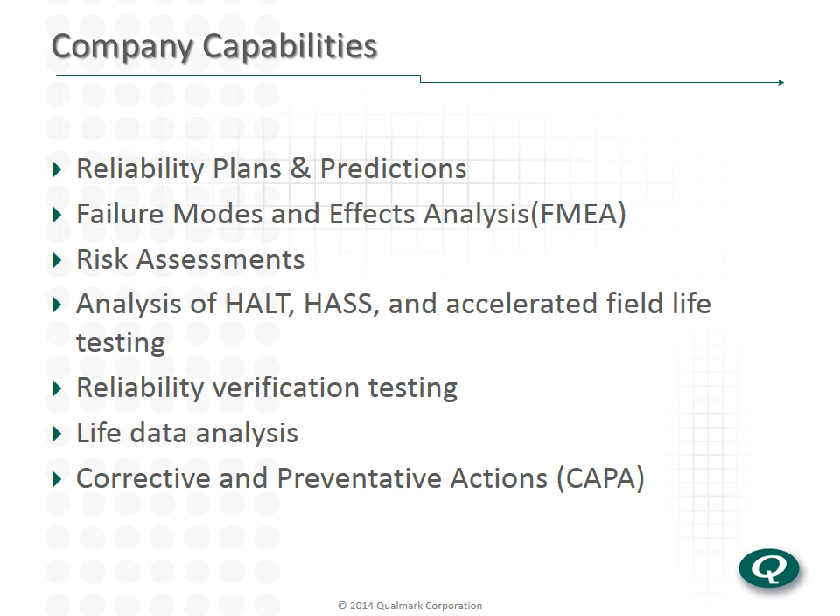Today we're going to talk about several things that are related to both risk management and reliability engineering. Over the years, as I have worked in various industries and worked specifically in the medical device industry, it's become very obvious that there are many, many similarities between risk management and reliability engineering. In fact, many companies combine those two disciplines.

We'll talk today about some of the reasons for that similarity between those two things and how we can use that to our advantage as we meet the requirements that are imposed on us by the regulatory community. And we'll talk specifically about a couple of examples of how reliability engineering principles and tasks can help us meet our requirements, our risk management requirements.

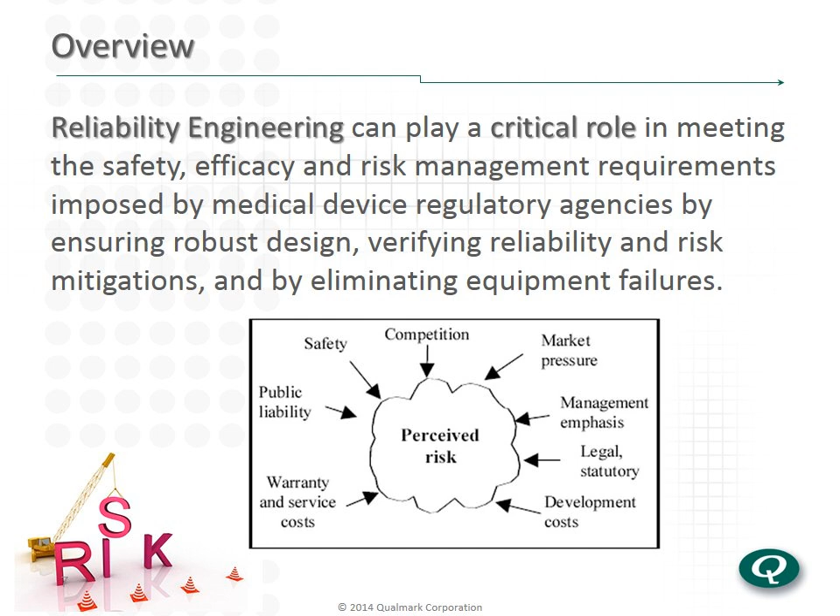So first, let's talk a little bit about reliability engineering and how it can play a role in meeting our requirements. Reliability engineering is aimed specifically at eliminating failures from our fielded products, whether they are design-related failures, whether they are failures introduced during the manufacturing process, whether they are inherent failures. We want to minimize both the failures and the impact that those failures have on our fielded product. So that's what we try to do with reliability engineering in a nutshell. I know that that is an oversimplification, but let's move on from there to talk about some definitions.

So reliability engineering is an engineering discipline, and as we talked about, its purpose is to make our products robust, to make sure that they don't fail when we don't want them to fail, when we can't have them fail. So reliability can be defined as the ability of a system to meet its required function over a stated period of time, and to meet or exceed that requirement.

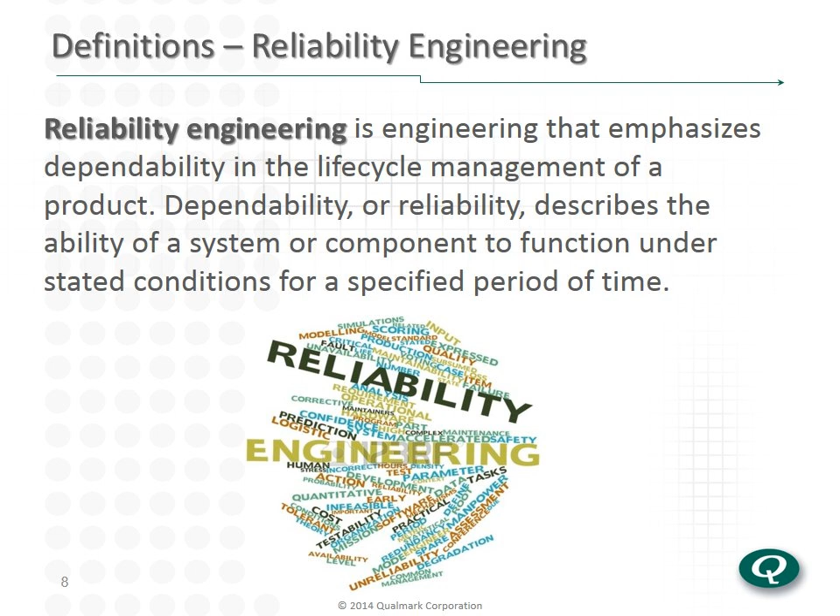Risk management is very similar, as I said. Risk management involves the identification and assessment of risks associated with the use of the equipment. Now, these risks can come from several different areas. They can come from equipment failure. They can come from human error. They can come from misuse of our product. They can come from several different areas. They can be environmental risks as well.

So, much like reliability, risk management is aimed at identifying, assessing, and taking action to eliminate risks, to eliminate the problems wherever they come from. Today, we will focus mostly on risks related to equipment failure.

As we get started, I want to talk a little bit about the 60601 3rd edition standard and what its purpose is and what it does. Basically, 60601 3rd edition combines many of the old 60601 requirements into one standard. And based on the general requirements of this standard, its requirements for basic safety and essential performance.

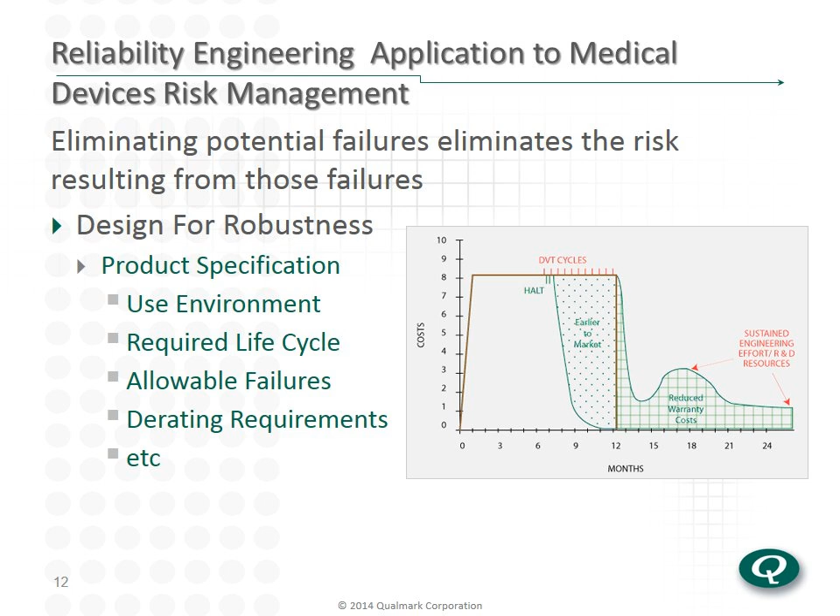And we need to make sure, I call it derating requirements, but we need to make sure, in fact, that we have adequate design margin in order to ensure that we don't put stresses on the components in our medical device that will eventually create a failure. So from a risk management standpoint and a reliability standpoint, we need to basically take the same actions in order to have a robust design.

We need to understand the potential failure modes and their effects. That allows us to prioritize the actions that we can take. We will never get to the point where we have a perfect design. We need to be able to have a logical understanding that allows us to design out those failure modes that will have an unacceptable effect on the product.

In order to do this, we need to analyze the design. We need to understand where the failure modes can occur, what happens when they do occur, and what, if anything, we can do to eliminate them. We need to understand the inherent reliability of our product. That can involve several different things.

That could involve a reliability prediction. That could involve understanding where the failures will come from. That could really understand through test, and we'll talk about this a little later, through test understanding what our design margins are and what our failures are going to be. As in any design process, we will need to make changes as we go through the process to improve our design, to improve and get to the point where we need to be.

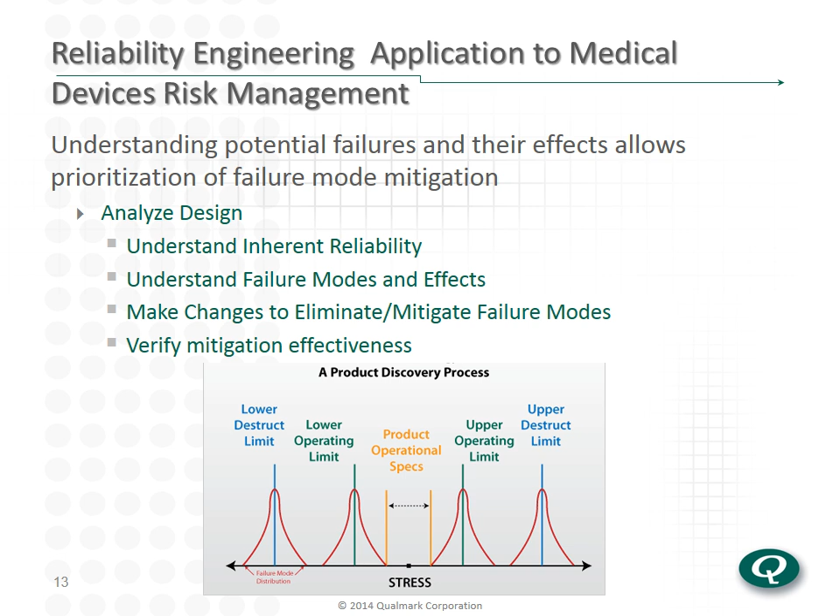HALT, which we'll talk about in much more detail as we go through this presentation, and I believe Neil will talk about that specifically, can help us understand and analyze our design strengths and our weaknesses. When we understand what our stress limits are, when we understand what our design capability is, we are in a position to make good choices regarding our design.

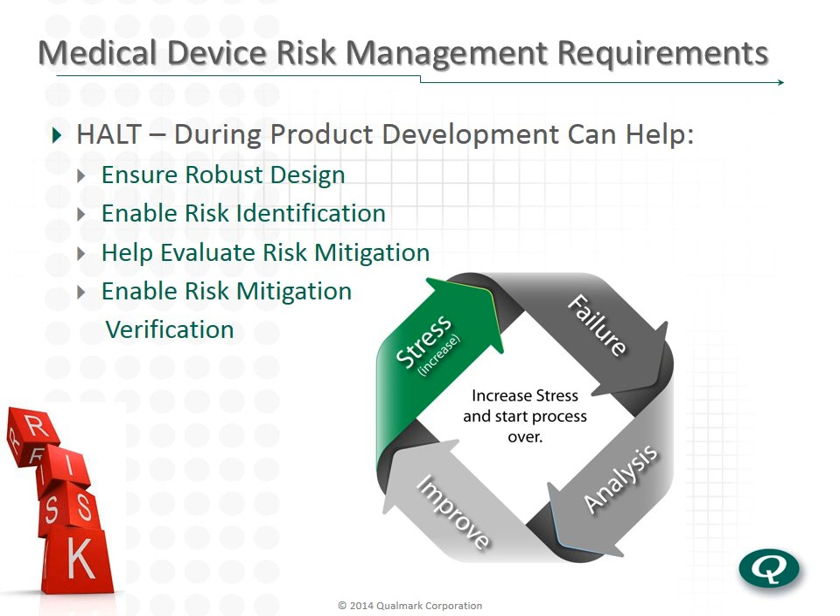We can ensure a robust design. We can ensure that we identify potential risks related to failures. We can also evaluate risk mitigation and enable risk mitigation verification. As I said, Neil will talk much more about HALT as we go along.

Reliability engineering principles can also be very critical in post-market activities. When we have adequate information about the performance of our devices once they are in the field, we are in a position that allows us to determine whether or not the device is performing as we intended. We understand what failures are occurring.

We can understand what the failure cause is, and how those failures affect patient safety. We can also understand and eliminate or mitigate further changes if we need to make them. We can make decisions regarding whether a product is experiencing unacceptable risk, whether it needs to be removed. So the point that I want to make here is that reliability and its application here is very critical in both pre-market and post-market activities of our device.

So let's talk a little bit about IEC 60601 3rd edition and some of the requirements. Now, I will say that this presentation only allows us time to talk about a few examples of reliability and how that applies to 60601. As we go through all the standard and all the clauses, we find many, many places where reliability engineering principles can be used. But let's talk about some examples.

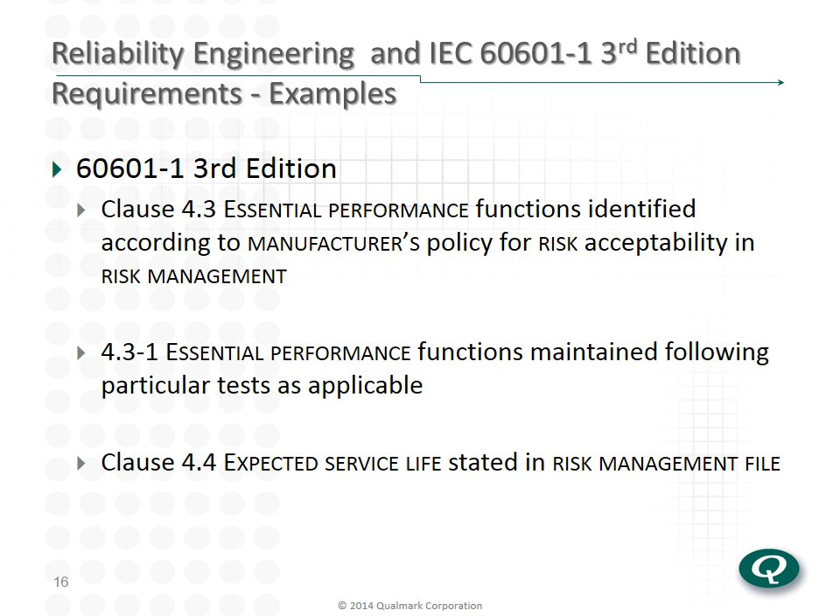So we need to consider very carefully what this device will see in its lifetime and understand how those different environments will affect the useful life of the product, will affect the failure of the product. Once again, this is something that can very well be evaluated using reliability engineering tools—the things that we've talked about, failure mode effect analysis, HALT testing, etc., all the things that we use in order to make sure our design is robust.

Other examples: Clause 4.8 talks about components and wiring, specifically looking at those components where a failure would result in a hazardous situation. This might be from exceeding their applicable ratings, or from several different areas. Specifically, that clause talks about the reliability of components used as a means of protection, and that we need to understand the reliability of those components.

Let me give you an example of what I mean. If we have a device whose safe operation depends on the function of a part or a subsystem, we are required to know the reliability of those parts. We are required to ensure that they have been tested and assessed to meet the conditions that they will be used in.

60601 specifically talks about some types of components, motors, transformers, etc., where insulation could be compromised. Those are other examples of 60601 and how it plays into the reliability engineering discipline.

Clause 4.9 talks about components with high integrity characteristics, provided because a fault in a particular component can generate an unacceptable risk. These are the types of components where a failure really can't be allowed. A failure of any of these high integrity components would result in an unacceptable risk to the patient. In other words, if it fails, somebody's going to get hurt. The standard requires us to treat these components very specially.

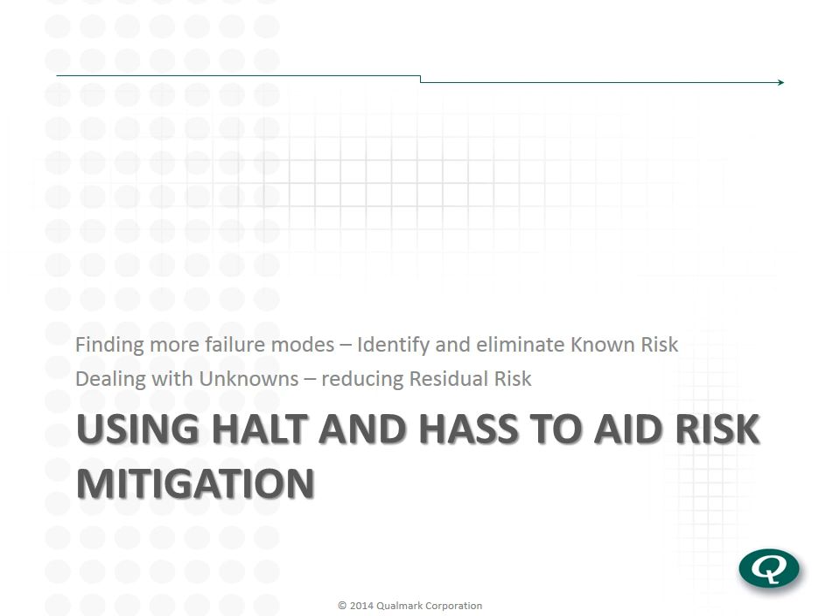Now, fortunately, we've got a fair amount of experience using HALT and HASS in the aerospace industry. And like the medical industry,

reliability is critically important in those areas. You just can't tolerate a failure in certain applications. Medical is one of them, aerospace is another.

And when failures happen in implantable devices, for example, of course, we've all heard the stories from different companies miserably going out of business from things like that.

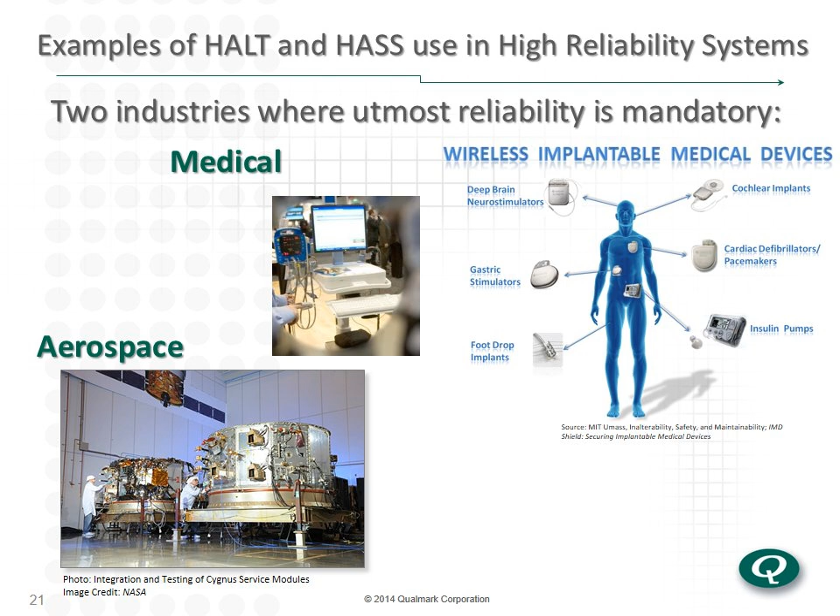HALT and HASS are used in industries like this where that high reliability is very important.

Now we are, as reliability engineers, facing challenges these days that are tougher than we ever have. We've got to keep the risk lower.

We have new requirements for understanding and reducing risk at the same time that the money side of the business is seeing price competition.

And we're having to deal with budget cuts, and we're having to deal with reduced test time, reduced resources, and time to market is being routinely reduced.

We want it fast, but we still want to be sure that there's no risk.

And there can't be a question of trade-off. We have to be sure that the risk is minimized, but we may even be dealing with technology we've never dealt with before.

So we don't completely understand how it can fail or what can go on with it. If we're not dealing with new technology, then we're not advancing as a company.

New technologies are what make us successful. But the failure characteristics of these new technologies can be poorly understood, and there's not a lot of hard historical data. So when we're faced with these challenges and the overarching umbrella of you must reduce risk,

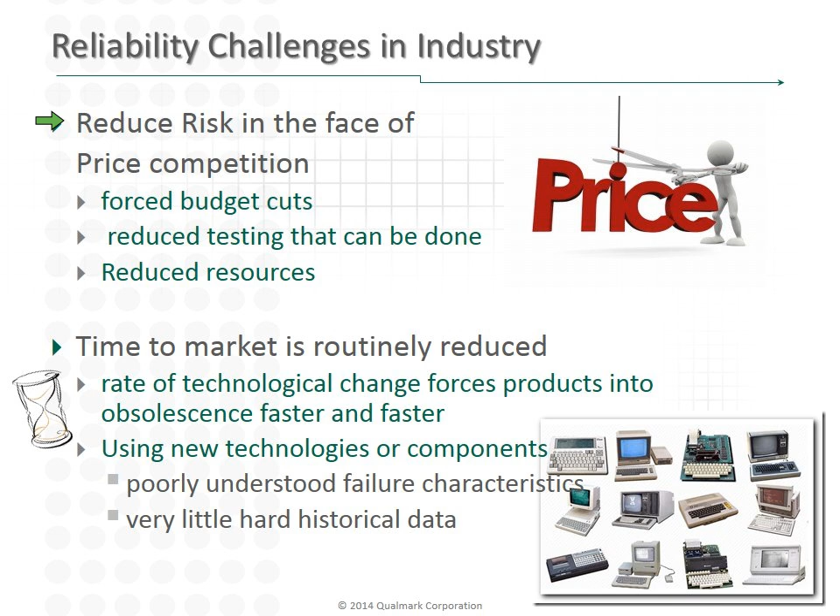we can feel like we're kind of between a rock and a hard place. But this is where HALT and HASS are very valuable for meeting these challenges.

Another challenge, of course, is that high reliability is becoming more important, and high reliability is meaning more and more.

The mean time between failure is expected to be greater now than it was 10 years ago. And when you get in a situation like that, doing standard accelerated life testing can take a long time.

And a failure found near the end of that accelerated life testing can be devastating to a timeline. I know that many companies have had significant delays to product release because near the end of accelerated life testing, they spot a design flaw. And this is not the time to find problems.

This is the time to prove you don't have any. Finding them in that process is very expensive. And you have situations where high reliability, as in medical, means either extreme cost or tragic

consequences. So you have to have that in-depth understanding of system operation and how it responds when a failure happens.

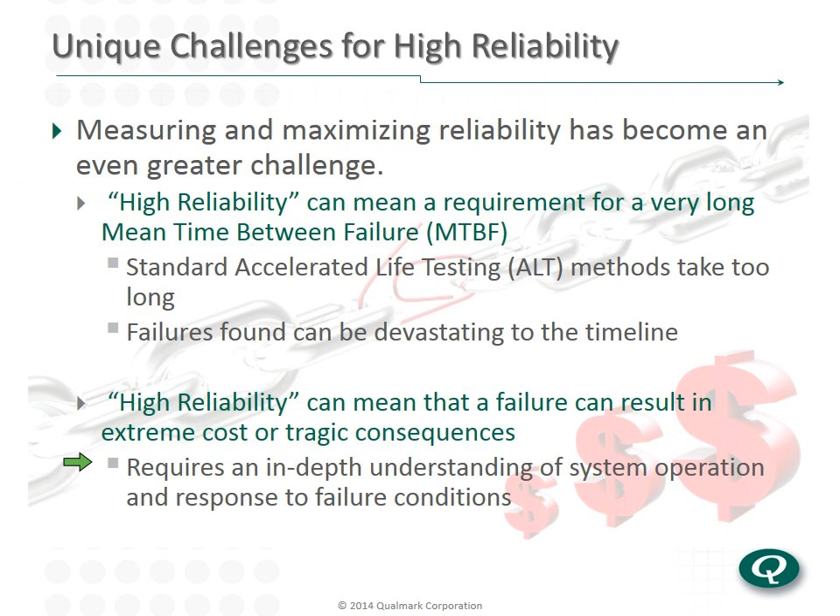A few other challenges for high reliability systems. In aerospace and in medical, we're often dealing with high dollar systems that are manufactured in relatively low volumes. And there's a package of additional challenges associated with that.

When you're running low volume, you have an inherently higher risk of variability. You're purchasing in lower quantities, so you have a risk of lot-to-lot variances that's higher than is the case in other industries.

And if you've got lower quantities, you're more likely to have hand operations. There's inherent variability in those.

So in a product where reliability is critical, you're saddled with these factors that make it more of a challenge.

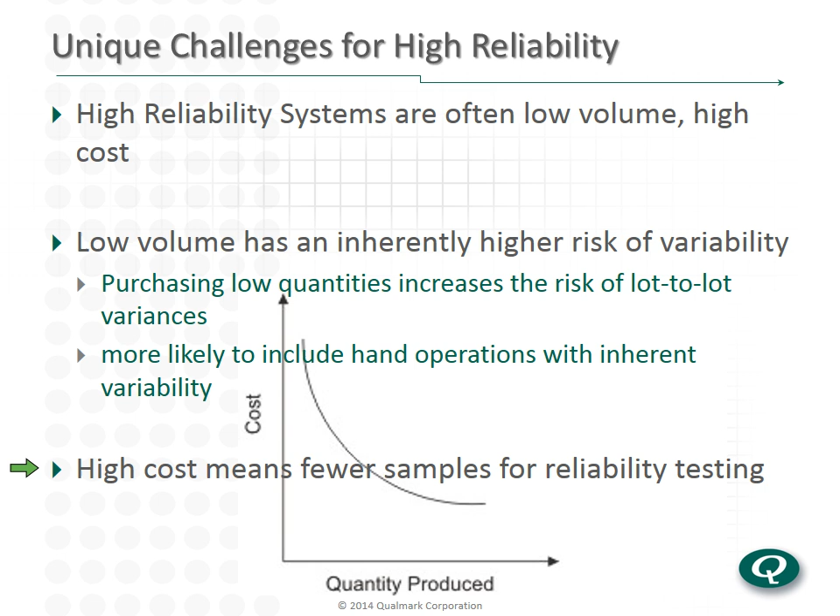And when you're doing very high dollar systems, they're very reluctant to give you 40 or 50 to do accelerated life testing on. It costs too much. So we've got fewer samples to work with and a greater challenge to meet.

As I discussed earlier, the final challenge is that a lot of times we're dealing with technology we've never dealt with before. We're continuously using higher speed devices. Every time you turn around, things are moving faster, signals are moving faster, measurements are happening faster. They're complex, interdependent subsystems, and it compounds all the difficulties.

The solution, or part of the solution, to modifying a reliability program to deal with these challenges is to shift towards more of a failure-oriented testing, a discovery process early on in the design, as soon as it is feasible, to learn as much as you can about the product, understand how it fails, with an emphasis on forcing failures and understanding how it fails. Once you get into manufacturing, you realize you have a system that is less tolerant of variability in the manufacturing process or in your component supplier, and you need methodologies for dealing with that and maintaining higher reliability in manufacturing.

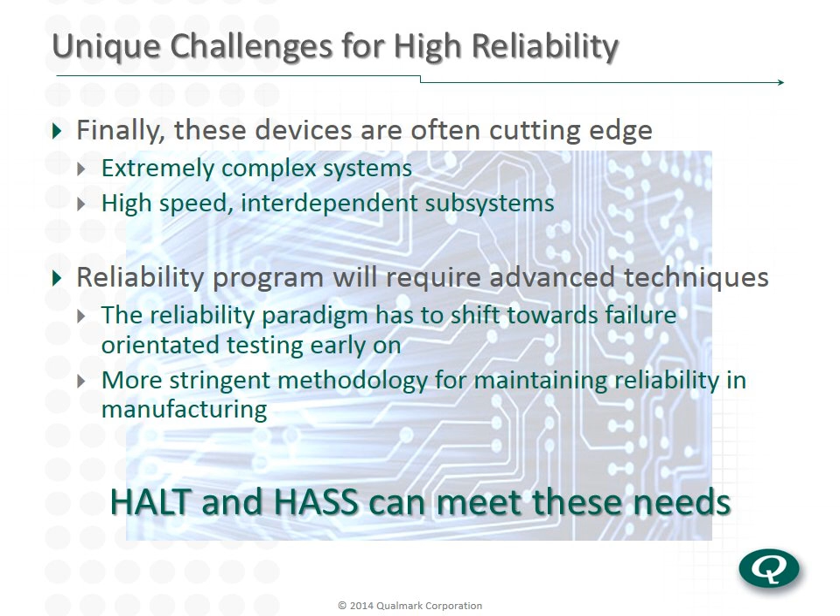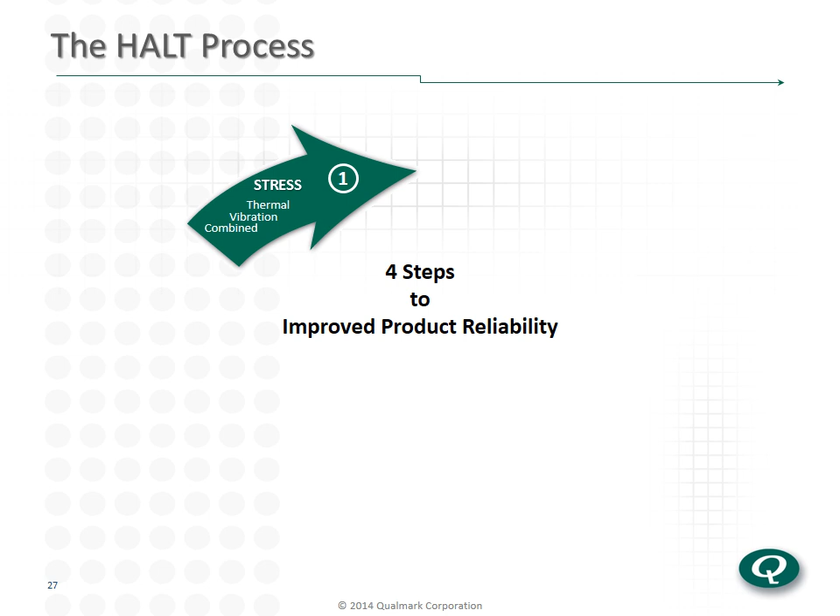We can talk about the HALT process in terms of 4 steps. First, we are stressing a product. We use thermal, vibration stresses, combined stresses, also stresses that are unique to your product. If there are other factors that can be incorporated, the more stresses you use, the more likely you are to find a fault, the more likely you are to take a risk from the unknown category and move it into the known and mitigated category.

And you increase stresses until you find failures. You determine, have I found an operating limit, a soft failure? I take the stress away, the failure mode goes away. Have I found a destruct limit, where I'm actually causing a hard failure in a product? And then...

Carefully understand - this is where the discovery process pays off. When you have a failure in your hand, you've got gold in your hands. And you need to do failure analysis in order to understand it and get down to the root cause of it and gain new levels of understanding of your product that you can't get any other way unless you force the failures to happen. See if there are improvements that can be made, corrective actions to be taken. Is this something I can fix, or is this something that is what we call a limit of the technology? We just can't do anything about it, but we understand it, we understand its effects, and we can intelligently conclude that the fault mechanism is tolerable. The key is intelligently conclude by doing failure analysis and understanding the product.

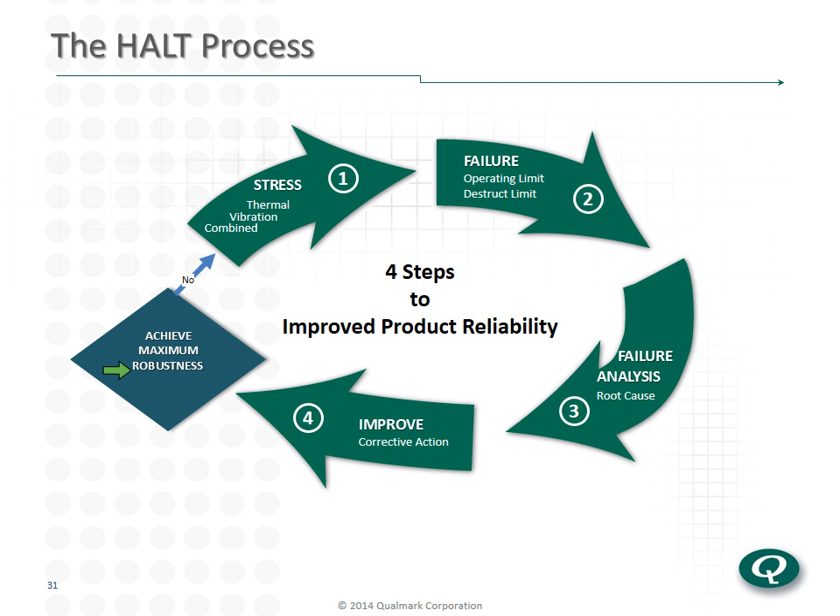If we have achieved our maximum robustness, that is, we've hit the wall for limits of the technology, made all of the improvements that we can reasonably make to eliminate risks. If we haven't done that yet, well, it's time to continue the loop and step stresses up higher, maybe switch to the next stress, continue the series until we've done everything we can to achieve this maximum robustness, which means that we have identified as many potential risks related to product failure that we can and have identified the solutions for those.

Once that is complete - and this is really the HALT process here - once that is complete, now we can take these results and use them to move into HASS, the Highly Accelerated Stress Screen. These tests use limits based on what we found here. So it's important that we go through this process before we move on here. By identifying what the product can actually tolerate and testing to those levels, rather than trying to test to levels of intended use environments, we're able to spot new risks before they turn into something that can show up in quantity in the field. We catch them at the very earliest stages and eliminate the risk before the product gets out the door.

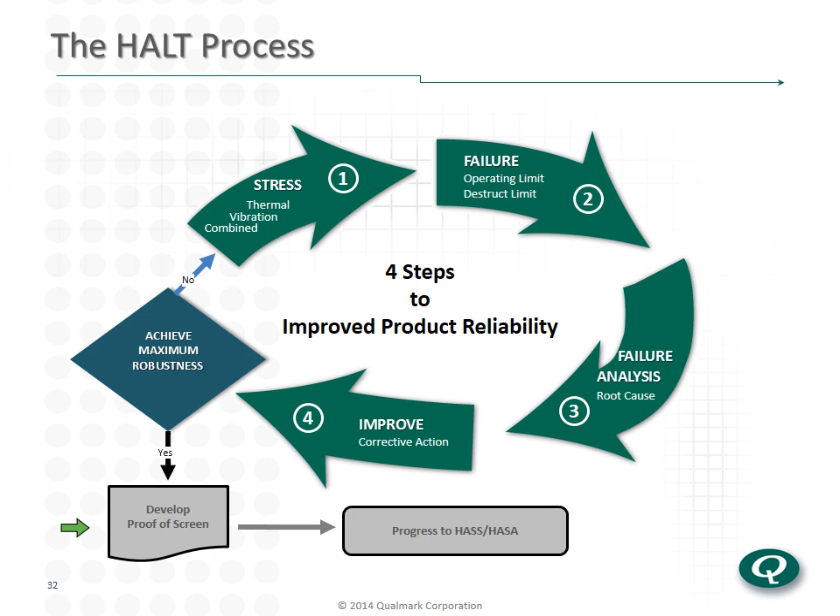Another way to understand what we're talking about in HALT and HASS is the concept of the margin improvement process. John talked about the importance of margins and the basic concept of derating to create products that are more rugged and therefore lower risk. Here you see operating limits and destruct limits that have been identified in a HALT and the actual operational specifications for a product for a particular stress. Must be the thermal because we have upper and lower limits defined.

HALT is usually done on a small sample, 4 to 6 units. So we have a few points. And if you just look at the points and say, okay, my operating limits are fairly well outside of my operating specs, what we have identified is our margins, the destruct margin and operating margin for the product on those samples.

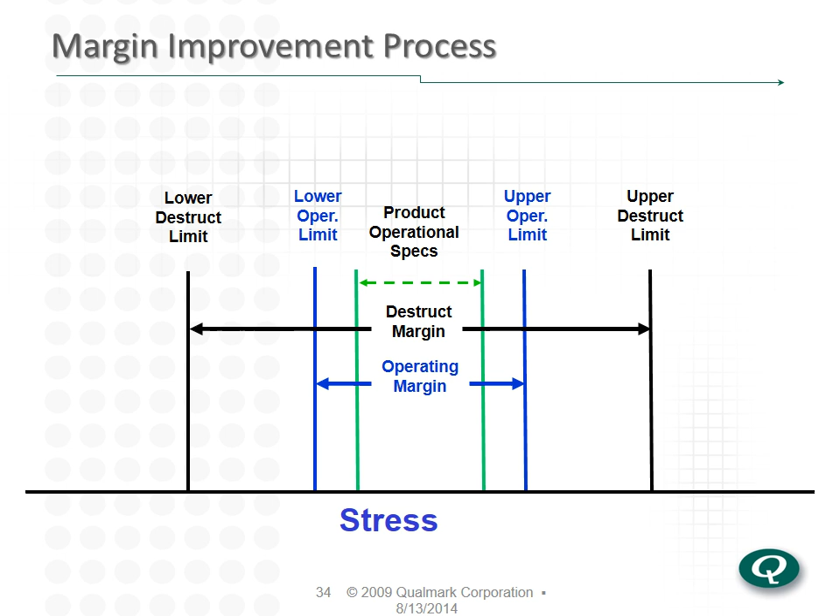The trick is that there's a distribution around those margins. We've got just a few units, and it's not just one failure mode—these distributions are really composed of many failure modes. If we eliminate a particular failure mode, that may allow us to move this operating limit out a bit and find a new failure mode. Many, many things cause this distribution to be the way it is.

But when this tail gets down into your operating specs, that means we're going to be having out-of-box failures or very early-in-life failures, even though on the few units we tested in HALT, we have operating limits that are outside of our operational specs.

By further derating the product, pushing those margins out, eliminating the failure modes we find here, what we wind up doing is getting these unknown distributions pushed out further away from our operating specs. By doing this, we make the whole system more tolerant of variances, so things don't show up as problems in the field, even when something shifts here.

As things age and fatigue in the field, we expect to see these creep in, and as components drift out of spec, we wind up with a product that has a longer life in the field before we begin to see defects in the operational range, when we've tested outside of operational specs and maximized these margins as much as makes sense.

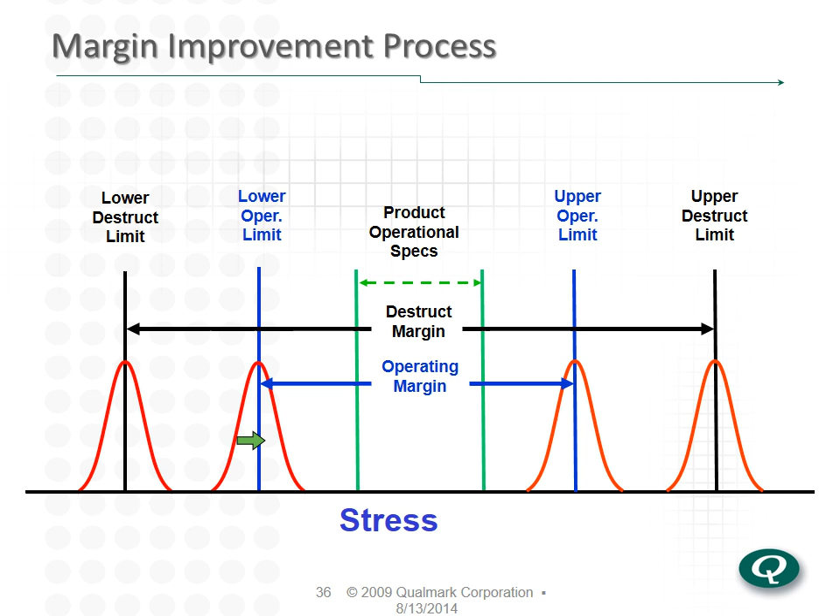The failures that you find when you're doing HALT, and you eliminate and push them out, are typically very similar to the failures you see in the first six months of a product's life in the field. We're not finding really complex things—we're finding relatively straightforward failures to fix. We're just finding them early, and that's the value.

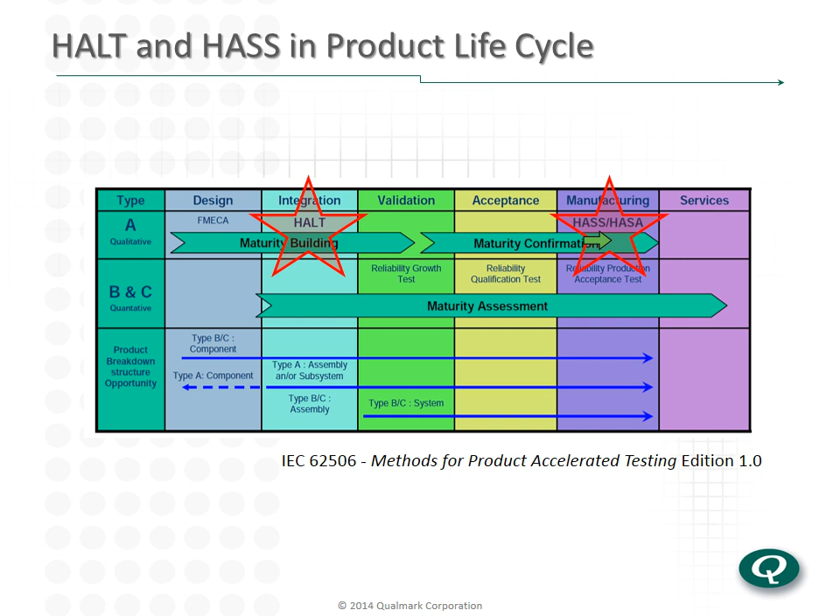If we look at IEC 62506, talking about where to use HALT and HASS in the product life cycle, it talks about HALT being a maturity building process and HASS being a maturity confirmation. The HASS production screen is really intended to give you an early warning that some new failure mode has crept in that has caused those distributions to shift.

When we develop a HASS screen, the basic idea is we understand what our operating limits are—these lines—and we develop a thermal profile that stays within the operating limits. We typically guard band that by 80%, so we don't expect to see products failing here; we expect to see them operating normally.

We also vibrate at about half the destruct limit that we identified in HALT testing. The relationship between fatigue and stress level is logarithmic, so the stress level or fatigue the product sees at this stress level is much, much lower when we go to the half limit.

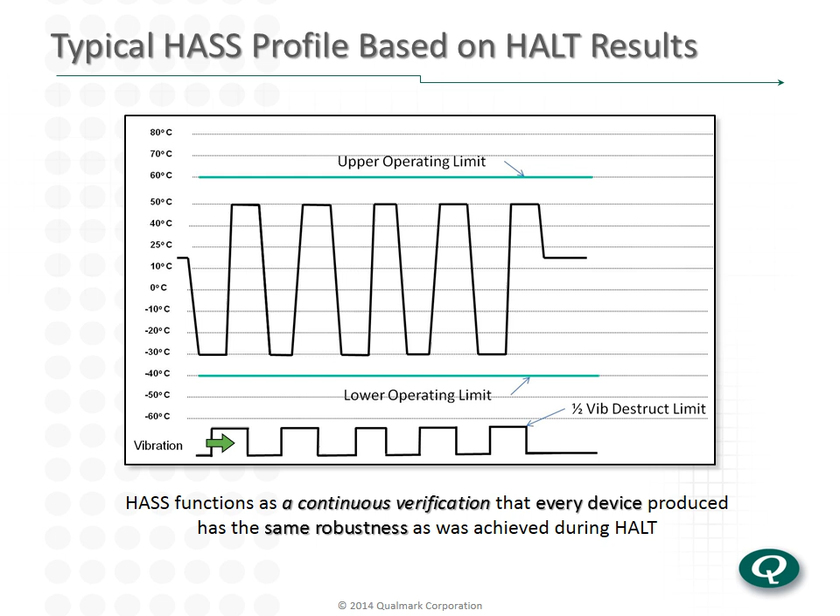Then we will do a proof of screen to demonstrate that we're not taking an unacceptable amount of life out of the product.

This whole process of using HALT and HASS to improve reliability in areas where reliability is critical is becoming much more widely adopted. Test requirements for launch, upper stage, and space vehicles—I believe HALT and HASS is being worked into those now. GM's been using them for years, Airbus, etc. We see the whole process becoming more and more adopted simply because it saves an awful lot of time and money.

Boeing used HALT and HASS in '94 on all of the key avionics components of the 777. Airbus actually published a HALT guideline saying if you want to be an Airbus vendor, HALT has to be part of your design process, and do that before your design verification. In 2011, Hamilton Sundstrand said HALT and HASS are key to meeting reliability challenges in aerospace. So you can see the value that's brought there.

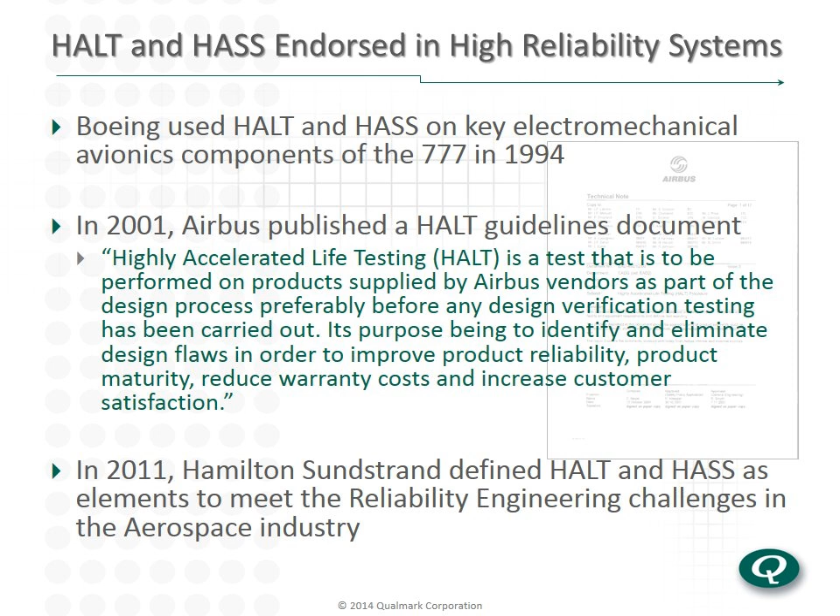So in general, we're using HALT and HASS to reduce both the known and the residual risk of failure. We talk about known or identified risks—the ones due to failure modes we have predicted or found in testing. But then we have the residual risk, the ongoing risk of things we don't know or variables we can't control.

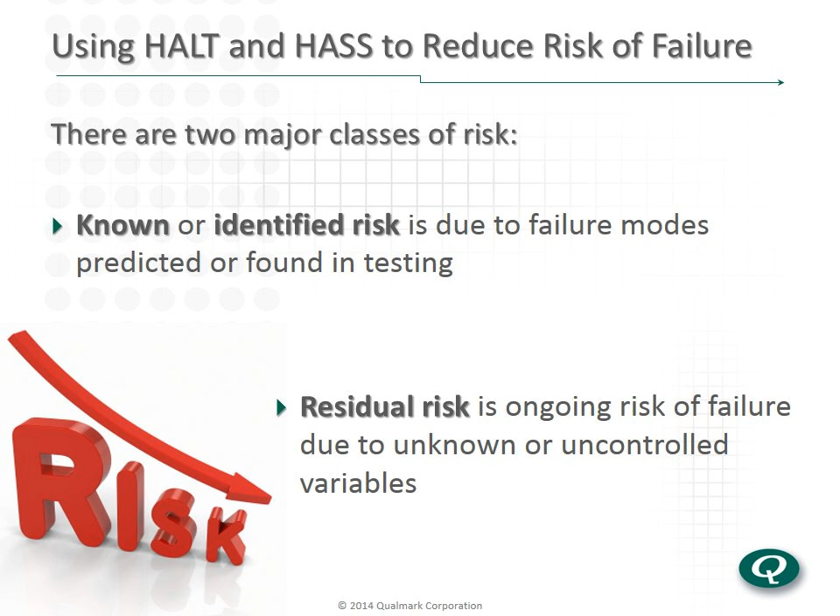To get rid of known risk, these are the things John talked about: let's do failure mode analysis, accelerated life testing, reliability growth testing. We can use HALT here to identify more failure modes, pull them into the known category, eliminate them, and then with those extreme stresses, demonstrate that those risks have been eliminated.

In satellites, they've found HALT to be extremely valuable. We had a nice paper published on using HALT at Space Systems Loral, basically saying we're convinced that HALT was instrumental in the successful qualification program and smooth transition into production. Again, indicating HALT is done before you go into your qual. It's not something you do at the end. You want to do this early and often and then move into your final qual with confidence.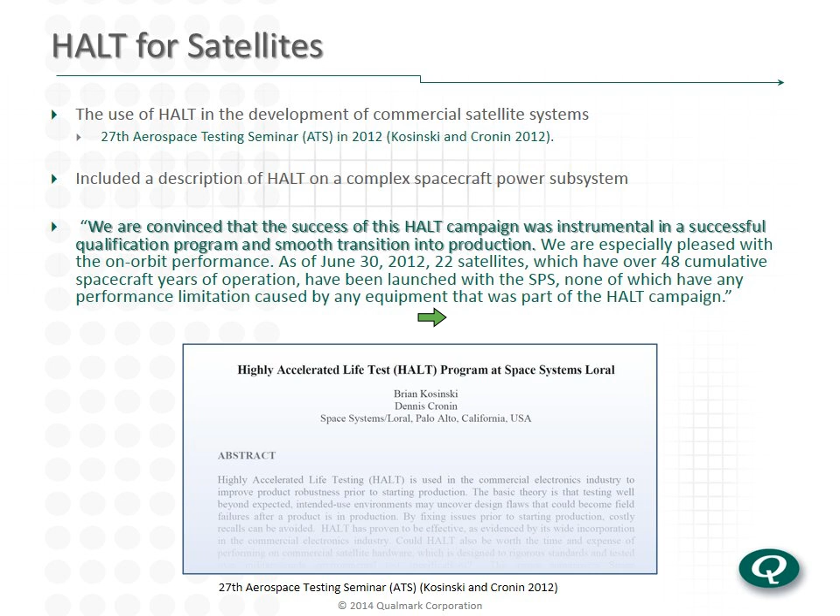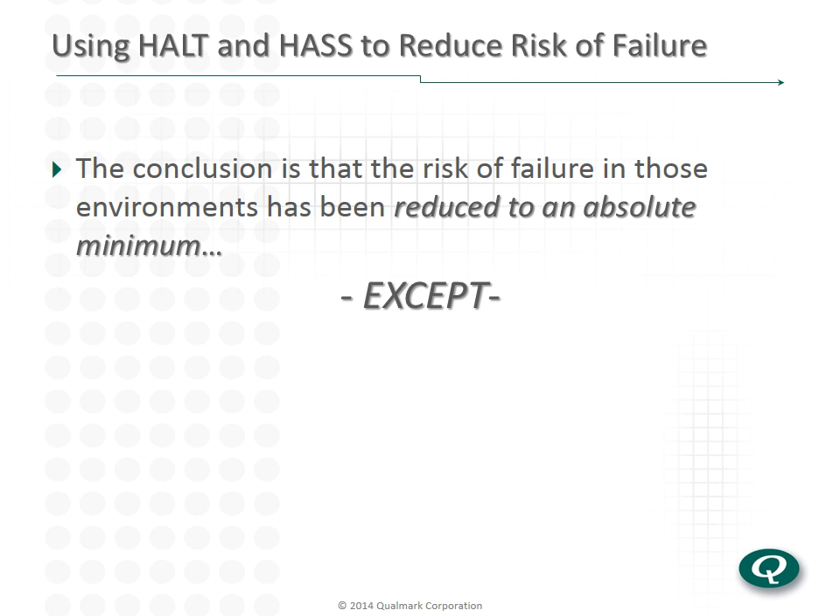They are also very pleased with the fact that nothing that they have launched has failed due to something that had HALT done on it. If we did HALT, we did very well. So the conclusion is the risk of failure in those environments has been reduced to an absolute minimum. We've pushed it as far as we can. Only problem is failures still happen. Failure modes that are exposed in HALT decrease the risk by identifying more sources of risk and getting rid of them.

And the graphical way to look at it, if you think of the risk of failure here, where one is I'm absolutely going to fail, we have part of that being identified and part of that being a residual risk. If we don't do HALT, we haven't identified as many risks as we could that are in the design, so there's still a risk of product failure at product release. It decreases over time as we identify and correct things, but then vendor processes or upsets can cause problems later.

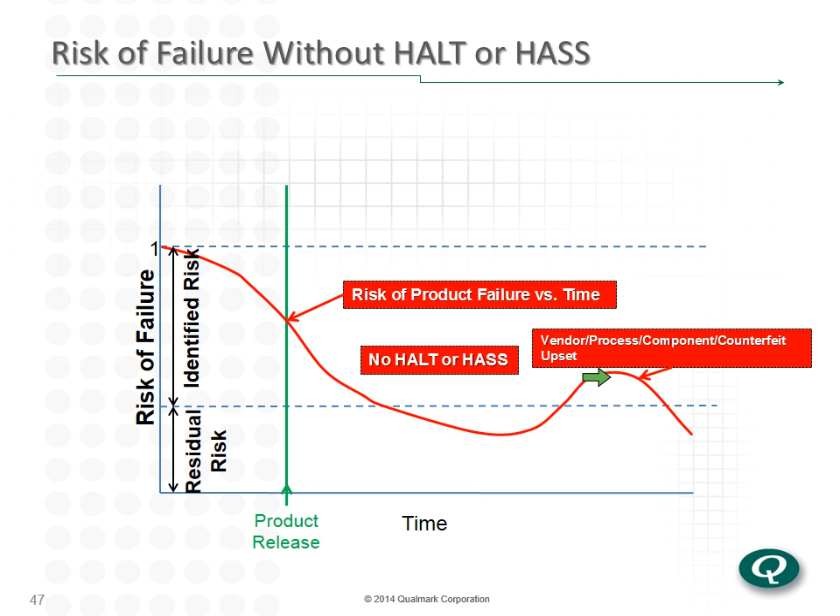If you get a HALT done early in the design phase, you will identify those failure modes, get rid of those failure modes, and reduce the risk dramatically. You will still have a residual risk of failure, however, because of vendor process changes, that sort of thing. But you've gotten rid of this early life risk.

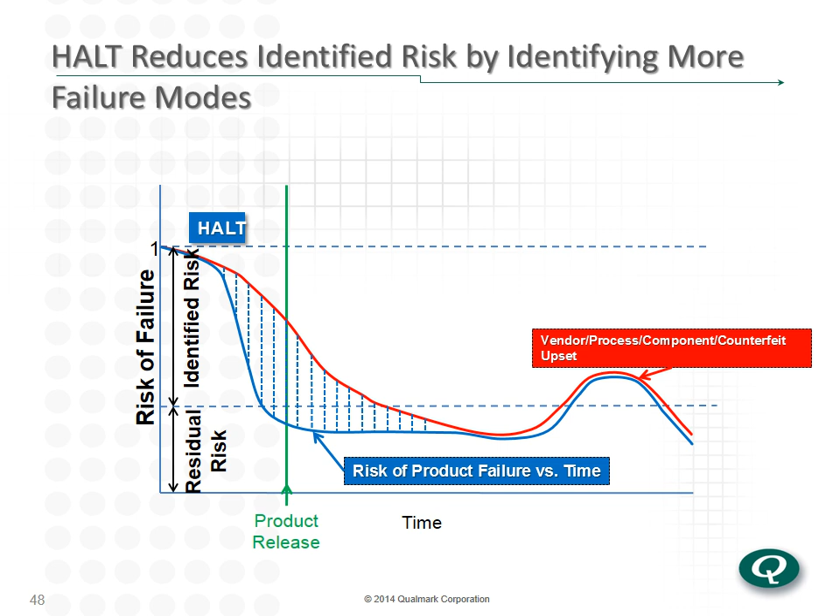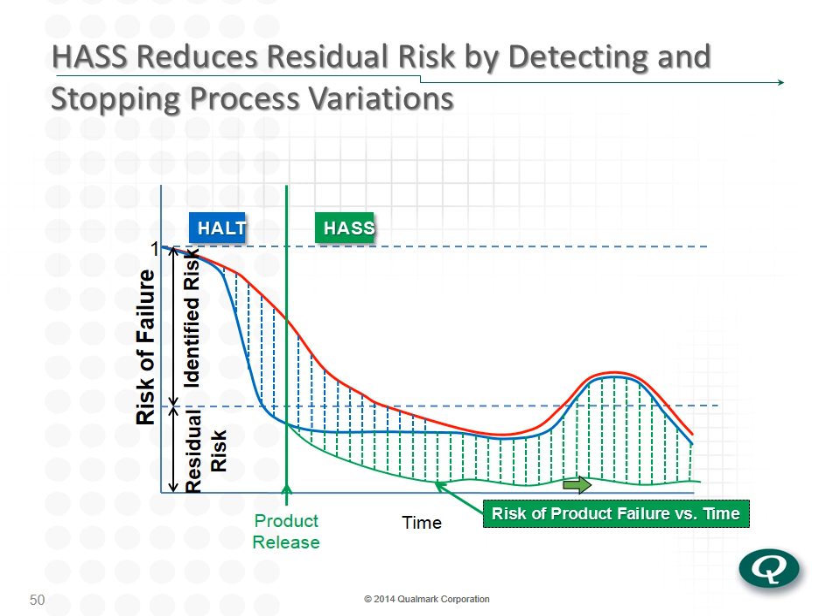So what do you do to get rid of that residual risk? The unknowns that you don't control, that's where you introduce HASS. And with HASS in place, the residual risk can be brought to a minimum. And here too is where the feedback mechanism of failure modes found in the field is extremely valuable for pulling that residual risk line down even further. Every failure, whatever its source, whether HALT, HASS, or in the field, is gold, and it needs to be understood so that you can use those results to reduce your risk.

So in summary, it's harder than ever to get reliable products out the door, and it's more critical than ever to get high reliability products out the door. HALT and HASS can be tools that let you do that much more quickly and deliver a product with low risks of failure.

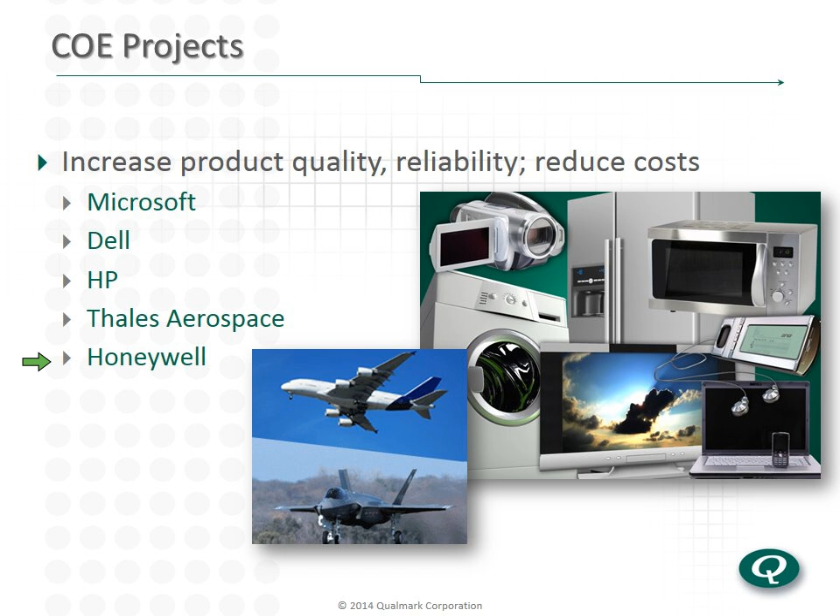And that summarizes what I think John and I have to say about the topic.